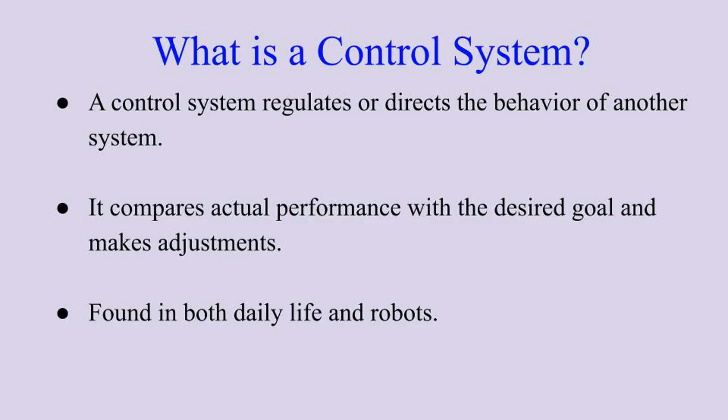Control systems are all around us, in the fan regulator, in the fridge, and in the air conditioner. When the room gets too hot, the AC senses it and cools it automatically. That's feedback control in action.

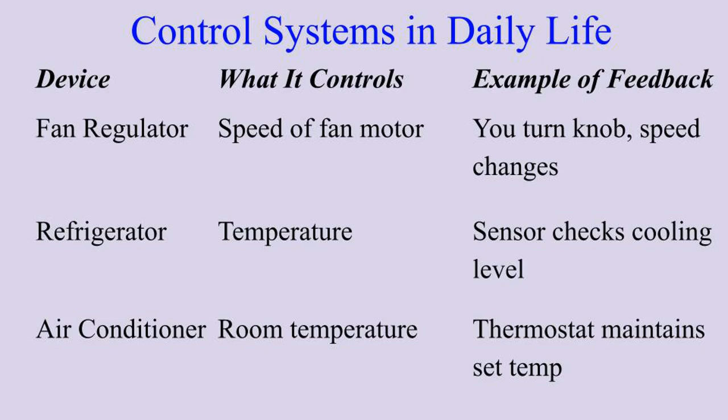In a manual system, we make the adjustments ourselves, like turning the fan knob to increase or decrease speed. But in an automatic system, sensors and controllers handle it on their own, like a smart AC that adjusts cooling automatically.

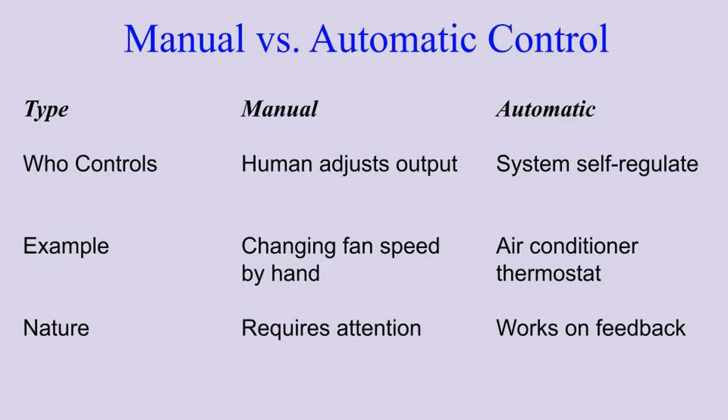Now, let's discuss control systems in robotics. In robotics, the control system is what keeps everything coordinated. The controller receives data from sensors like position or pressure and then sends commands to actuators to move exactly as needed.

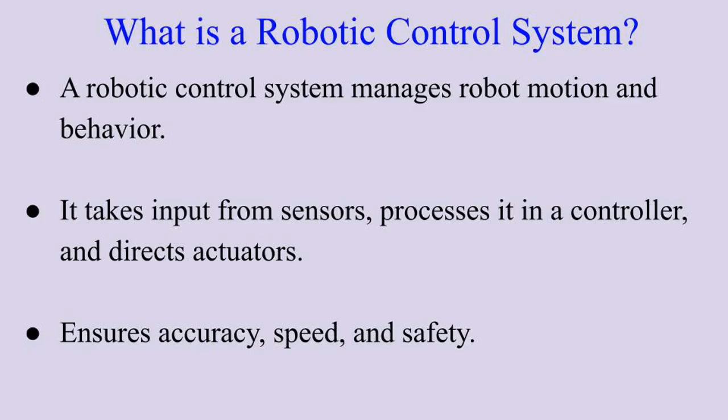This is the control loop. The input tells the controller what we want. The controller moves the robot through actuators. Sensors check if the goal is reached, and feedback goes back to the controller. It's just like your brain, muscles, and nerves working together.

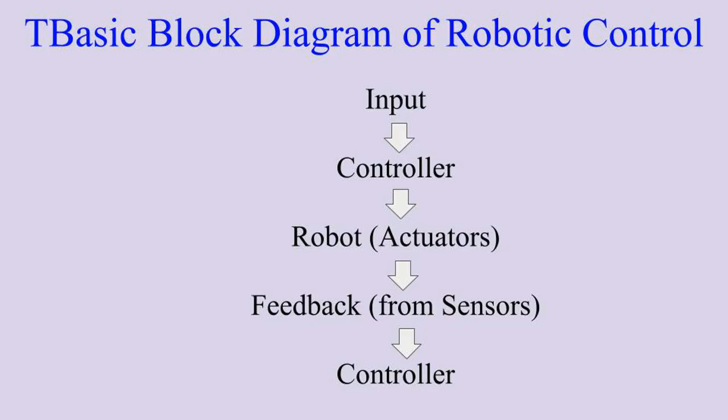Every robot follows this same process. The input is the instruction. The controller makes decisions. Actuators act. Sensors check results. And feedback keeps refining the movement.

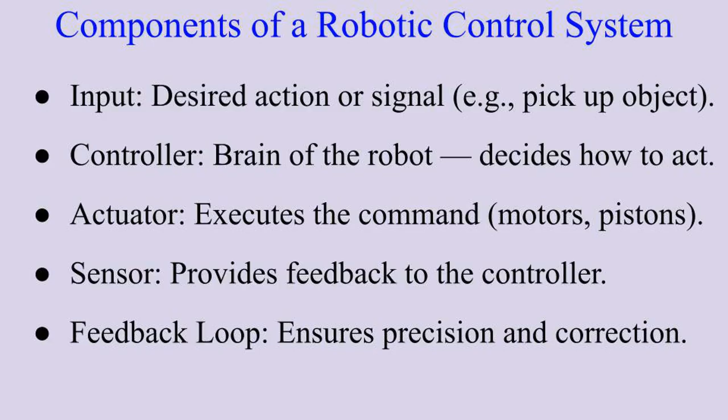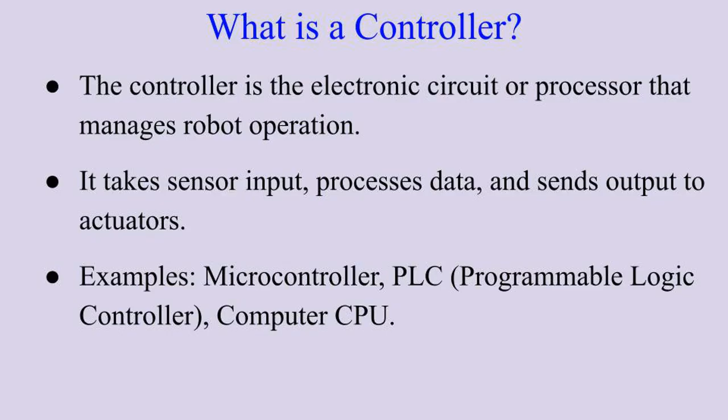Now, we'll discuss the controller, the brain of the robot. The controller is the robot's brain. It can be a microcontroller like Arduino or an industrial PLC. Both are designed to take decisions in milliseconds. The controller interprets the data, just like your brain interprets your senses.

The controller acts continuously, it reads the environment, checks if the movement is correct, and adjusts in real time. That's what allows robots to work with human like precision.

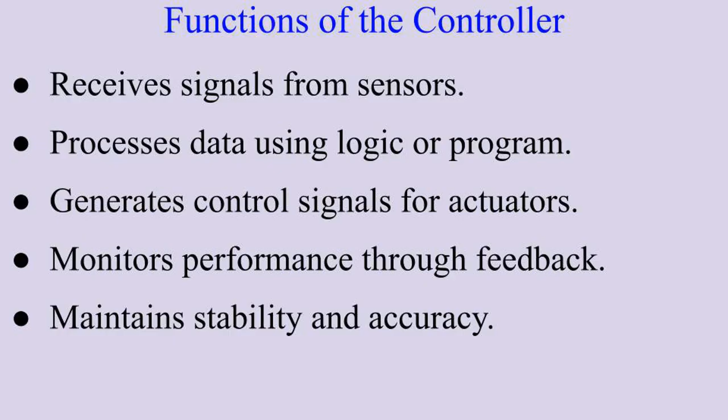This control loop repeats many times per second. For instance, when a robotic arm is supposed to lift 10 centimeters, the controller keeps checking the sensor reading until the arm reaches exactly that height, not more, not less.

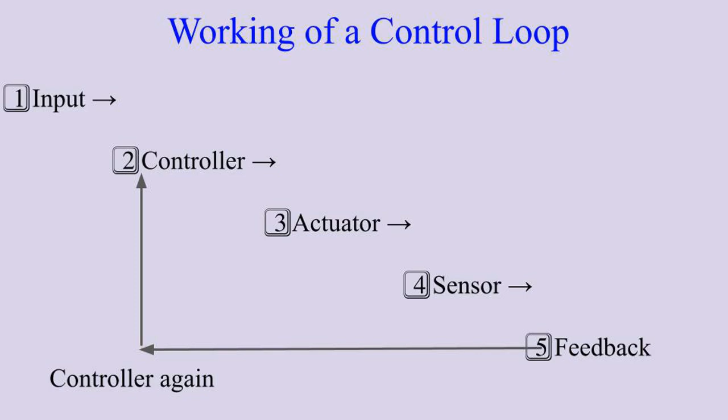Now let's talk about integrating sensors, actuators, and the controller. Integration means linking all parts together. Sensors tell what's happening, the controller decides what to do, and actuators carry it out. It's teamwork inside the robot.

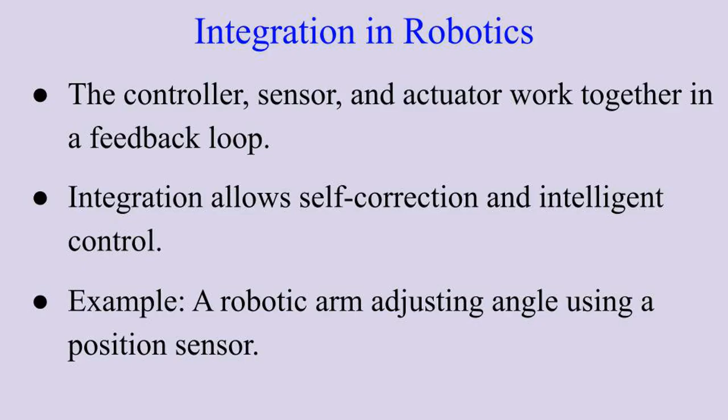Let's see how this works in a robotic arm. The controller sends current to the motor to move the arm. The position sensor measures how far the arm has moved and sends data back. If the arm hasn't reached the target angle yet, the controller adjusts the motor instantly, ensuring perfect angular control.

This is a perfect example of closed loop control. The robot doesn't just move, it knows how much to move and stops only when the target is achieved. This precision is why robots can assemble microchips or even perform surgery.

Now, our next topic, manual versus automatic control in robotics. In manual control, humans decide every move. In automatic control, the robot decides for itself, using sensors and programmed logic. That makes it much faster and far more accurate.

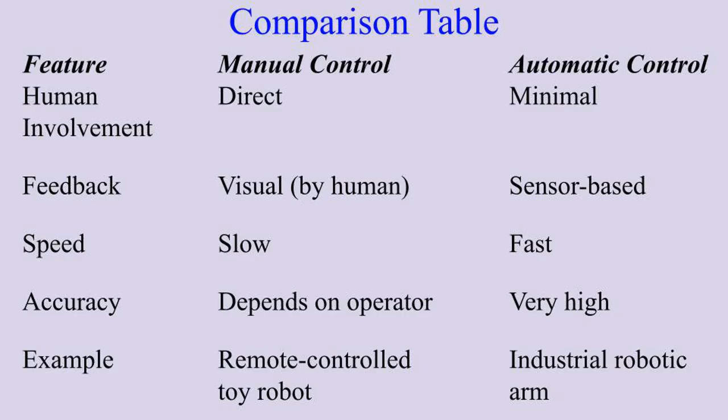To sum up, sensors provide awareness, actuators provide movement, and the controller provides intelligence. Together, they create a robot that can see, think, and act almost like a human.

So, next time you see a robot moving smoothly or picking up an object perfectly, remember, behind that precision lies an intelligent control system, constantly thinking, adjusting, and learning.